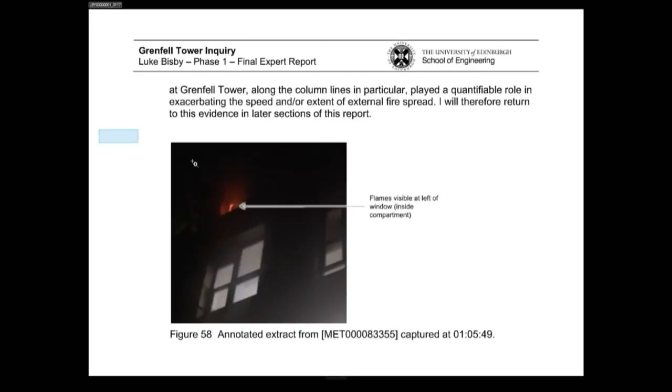Before I go to that, Professor, can I ask you please to turn first to page 117 of your report and look at figure 58. This sits within the part of your report dealing with vertical fire spread in the early part of the fire, and you identify this as a picture extracted from the video, captured at 1:05:49, showing flames visible at left of window inside compartment.

I just want to pick this up with you as a data point. At this point, 1:05:49, could smoke from within the compartment be heating up the UPVC window surround, causing it to deform? Yes. What about radiated heat from the fire? Yes.

Now what I'm going to do is start the video and run it up to 1:11. I'd like you to signal when you want to stop and identify important things, because we've heard earlier that you changed your opinion between your first report and your second report. I need you to explain by reference to this video what we see, focusing particularly on the timing of the fan failing and the timing and place of where we see melting droplets of polyethylene. Okay, so you're going to be in control. I will try. And if you have to go back to anything, we can do that. Can we start, please, Paul?

Thank you. Can I take you back into your report at page 122? I want to pick up figure 66 - this is actually page 123, it probably spans the two. You identify in the text at figure 66, at the bottom of the page, intermittent flaming between the spandrel cassettes above, between level 4 and level 5. And we saw that on the video, and you showed us that.

And also intermittent flaming at the vertex of the column and the spandrel. Is that more consistent with hypothesis B1 or with B2? The intermittent flaming at the junction between the spandrels, I would say, is more consistent with the flames venting hypothesis. The flaming at the column could be due to either of those hypotheses.

Under hypothesis B1, would one expect to see the burning of the cladding directly or more directly above the window, as opposed to on the side, as we do? I would expect that, given the buoyancy of hot gases and the tendency for flames to move in that direction, yes. So would that not then tend to support hypothesis B2 over B1? Or is that just shorthand again? I think so, yes.

Similar question - look at figure 68A, please. This is thermal imaging, page 126 of your report. And you've set out the relevant thermal images at the second pulse and a second after the second pulse, at about 114. Looking at this...

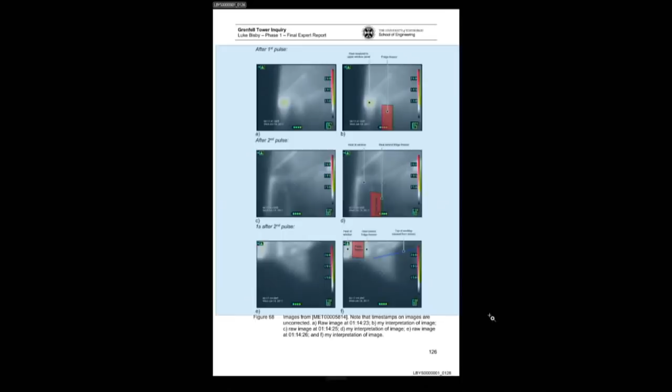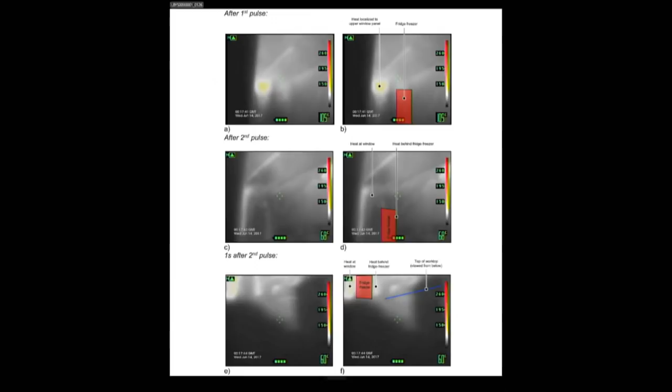Is the picture that these show, particularly figure 68A, the heat still there after the first pulse, and then the absence of it after the second pulse, consistent with your hypothesis B1 that the fire vented out of the open window or the extract fan? The hot spot, as Professor Torero discussed yesterday, given the resolution of these images, it's difficult to say anything too conclusive. That hot spot in this image does appear to be approximately in the location of the extract fan panel, which could indicate that this is a time - here we're at about 114? Yes.

So it could just simply be the extract fan panel burning, or it could be anything burning in that location, but it's in the approximate location of the extract fan panel, I would say. Does this evidence help us in any way decide as between hypothesis B1 and B2? Not really, in my opinion, no.

Moving on to some other evidence, we have evidence from firefighter Daniel Brown that after 1:20 a.m., a little bit later, he could see within the cavity behind the panels and could see fire travelling up the building. He leant out of the window and aimed his jet into them. He says in his contemporaneous notes - for the record, this is MET 000 5251 at page 3 - that the fire was travelling in an upwards direction behind the cladding. It was easy to see, he says, the material behind it was alight and travelling upwards. However, the vast majority of the cladding remained in place, and any attempts to extinguish simply bounced off. And similar evidence later when he gave evidence and in his statement to the police in fuller form.

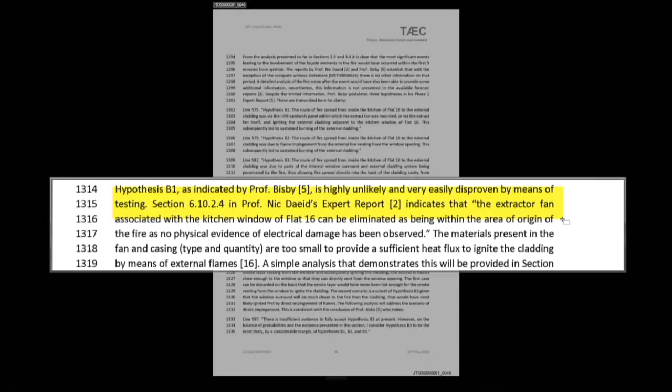So he says hypothesis B1, as indicated by Professor Bisby. I think, is this his most recent version of his report? Because I think he's referring to my original B1. He may well be, in this location. I can hear mutterings around me, which rather indicates that I should... I think this is referring to the fire starts in the extract fan as a hypothesis.

Now, moving forward then, to talk about direct flame impingement through an open window, is it relevant, having considered Professor Torero's report and also seen your own work based on the visual inspections of the video, that flames would have come out from a hot compartment into a relatively cool atmosphere outside? Certainly one of the consequences of venting outside is a cooling effect, both on the gases and on the flames, as a consequence of the cold air entrainment that would occur, yes.

Would that have affected the ability of flames coming out of the open window or the gap left by the vent extract fan to impinge upon the ACM? Potentially, but we see flames impinging on the ACM in the footage, so we do know it's happened. The question is whether the time at which it happens, which is admittedly 2 to 3 minutes after we suspect that we see involvement of the ACM cladding, gives us enough confidence that that is the primary candidate for ignition of the cladding, or whether that is a secondary effect that happens after the cladding has already ignited from within.

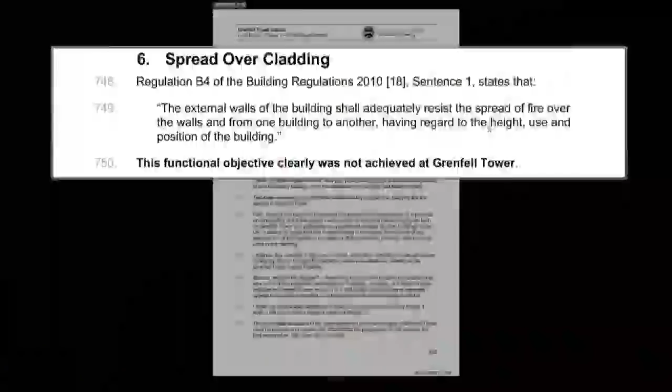748 to 750, and you've got regulation B4 up there, and you say the functional objective of B4 is that the external walls of the building shall adequately resist the spread of fire over the walls and from one building to another, having regard to the height, use and position of the building.

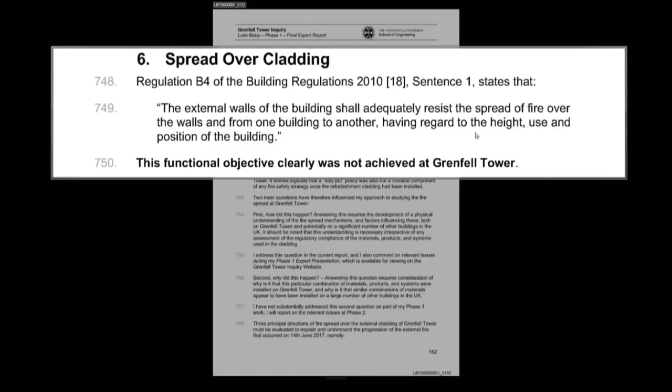And you say the functional objective was clearly not achieved at Grenfell Tower. I think it's right that you haven't at this stage considered compliance with the guidance in approved document B, have you? Not significantly, no.

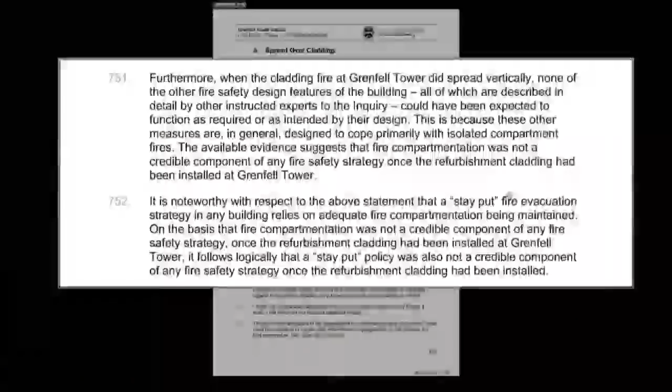You do, though, go on to say at paragraph 751 and 752, and particularly in 752, picking it up in the third line, that on the basis that fire compartmentation was not a credible component of any fire safety strategy once the refurbishment cladding had been installed at Grenfell Tower, it follows logically that a stay-put policy was also not a credible component of any fire safety strategy once the refurbishment cladding had been installed. And I show you that.

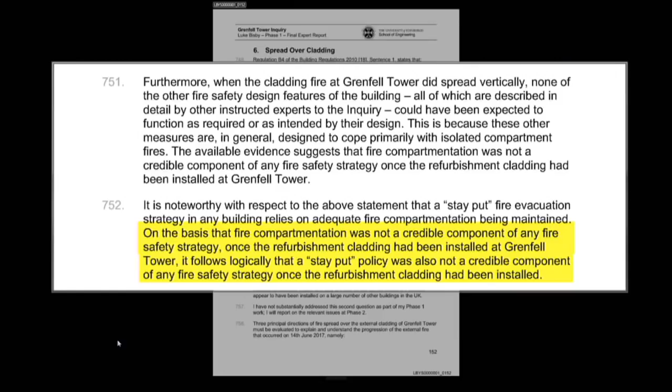And there are three, I think, reasons why you say that in terms of directions of fire spread: upward, downward, and horizontal. And those different theories underpin this basic thesis that a stay-put policy was not a credible component of any fire safety strategy at Grenfell after the refurbishment.

The fundamental assertion I'm making here is that if a fire is ignited in a cladding system such as this, made from these materials, under any circumstances, we have to expect it to spread quickly and catastrophically because of the nature of the materials involved. On that basis, it is unreasonable to expect compartmentation to be maintained, and it is unreasonable to have a stay-put policy in place.

Now, of course, that relies on someone recognizing that they've got this material on their building. Yes. Which is clearly not the case, apparently, here. Well, I recognize it's quite a strong statement, but it's in a sense a philosophical one. Well, so philosophical, and that's your opinion. Yes, but it relies on this assumption that people actually are aware of the cladding that they have on their building.

Yes. Now, I'm going to ask you some detailed questions about your analysis of each of the three routes of fire spread: upward first, then downward, and then horizontal, if I can.

Before I do that, can I just ask you to look briefly at Dr. Lane's basic hypothesis. This is BLAS 5010 at page 5, figures 10.2 and 10.3 of Dr. Lane's report. We can just have those up there. They're there for you. She has identified 6 different pathways for fire spread, and you can see those particularly in 10.2, and then you also got F in 10.3.

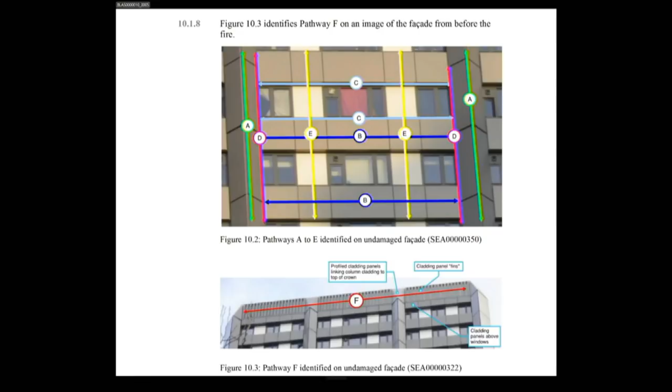I have questions about A and D, the columns. They represent the 2 vertical channels, I think, that you say played an important role in the fire spread on the night. That's correct. That's right, is it?

Now, Dr. Lane's also identified a 3rd vertical pathway, E. You can see it, it's yellow in figure 10.2, which I think is via the insulating core panels which connect between the spandrel panels. Would you agree with her? I mean, I would agree that those are continuous bands of material that can burn. I'm not sure that I would agree that I've seen either evidence or a physical mechanism by which that is a direction of travel of a fire front, if you see what I mean.

I do. We'll leave aside fire front, we may come back to that. Can I just ask you to be shown page 39 of Dr. Lane's report, figure 10.37, under paragraph 10.7.2, which is a photograph of the vertical fire spread up insulating core panels, estimated time at 1:26, taken off YouTube. Now her view is that this image shows evidence of fire spread up the insulating core panels. My first question is, have you considered that as a pathway?

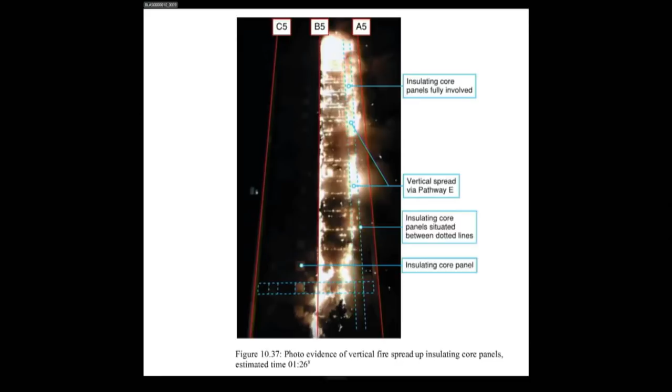I've considered the fact that the insulating core panels will burn. Yes. So this is a photo that shows insulating core panels burning, yes? That is what she says. It's not necessarily a photo that shows vertical fire spread, because we can't see which way the fire is going in a still image. I follow. Yeah? That might seem a bit pedantic, but I do think it's an important point.

So I could assert that the insulating core panels have been ignited by falling burning debris rather than an upward fire spread mechanism. And on the basis of this image, I don't think you'd be able to say that I'm wrong. Okay. Does that make sense?

Thank you, it does. Yes, it makes sense to me. I'm not saying that it isn't - I'm just saying that I think it's difficult to assert that.

I mean, we could discuss in detail my fire spread mechanisms. I suspect that we will.

All right. So you say that on the basis of this photograph, you couldn't confirm to a degree of confidence that the insulating core panels were a route of vertical fire spread.

That's correct. The insulating core panels burn, or the core material, the XPS inside, is a combustible material, and it will burn under some conditions. How it is that any one of those particular insulating core panels that appears to be burning in this image came to be burning, I think is almost a different question.

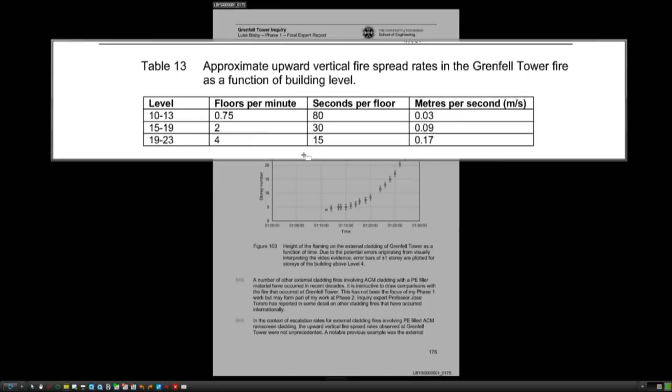Now you've got a table at the top of that page, table 13, approximate upward vertical fire spread rates in the Grenfell Tower fire as a function of building level. And I think we can see, is this right, that in general the rate of spread gets faster as the flame front gets further up the building?

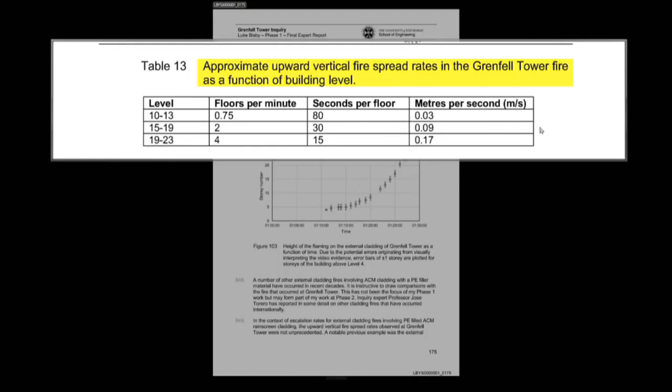Yes, that's true, and you can see that. It only takes 80 seconds to go from level 10 to 13, but it only takes 15 seconds to go from 19 to 23. That's correct. It's travelling at a rate of 0.17 metres a second. So yes.

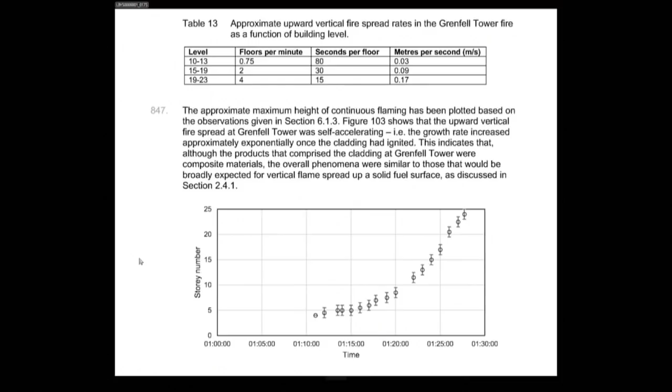Now, I think you say, at paragraph 847, just under that, you do say this is similar to vertical flame spread up a solid fuel surface. It's the last sentence of that paragraph.

Yeah, I mean on a solid fuel surface you would expect an exponential increase in the rate of spread based on the available research. Yes.

Right. Now, when you say a solid fuel surface, could you just explain what you mean by that?

So the scientific literature on vertical fire spread, dating back many decades, people have been running experiments on vertically oriented fuels so that we can try to understand the physics of the upward concurrent fire spread mechanism. Obviously, if you want to understand something that is actually quite complex in terms of the physics, even for a vertically oriented fuel that is totally homogeneous, is a single material, doesn't melt, doesn't drip, doesn't flow, doesn't warp - it's a very well-behaved material - even studying upward concurrent fire spread on that very simple case is extremely complicated, in order to reproduce the physics.

And I was at a conference two weeks ago where the keynote lecture was by a chap who is still trying to do this for the very simple case. And then you bring a second surface in, you have a cavity, and he just sort of put his hands in the air and said, forget it. The models that we have, even the most advanced models, can't do this at this stage. So it's important to recognize the complexity of the science that we're dealing with here.

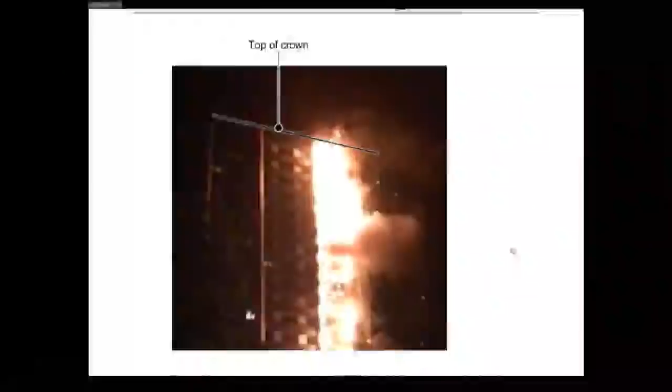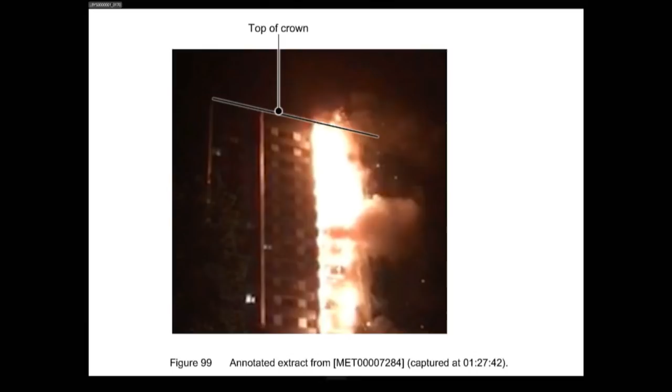But perhaps we ought to look at that. This is figure 99, a photograph captured at 1:27:42, showing that the Crown was involved in the fire by this time. Is this about the earliest moment when the Crown was involved, or was it involved there or thereabouts? There or thereabouts, I mean, I would say give or take 2-3 minutes.

Looking at this image, is there anything you can take from it which tells us anything about the mechanism for fire spread at the top of the building? Not as yet, I would say. I think we do see it later in some of the videos and photos, but on the basis of this photo, no.

Now, you've got, I think, five hypotheses of vertical fire spread, which you cover under section 6.1.6 of your report at page 177 and following. And you conclude at paragraph 859 - if I can just ask you to look at that, page 178, just highlight that please, Paul - you say that of all the available evidence presented thus far in section 6 of this report strongly supports hypothesis C1. I consider the presence of PE-filled ACM rain screen cladding cassettes to be, by a considerable margin, the most important factor contributing to upward vertical fire spread and indeed to external fire spread generally during the Grenfell Tower fire.

Now, we'll look at some of this in a bit more detail, but Dr. Lane's opinion is that the columns on the building were the principal route for vertical flame spread. Do you agree with her? Yes, I do. Are you able to explain the mechanism by which flames were drawn into and up the columns?

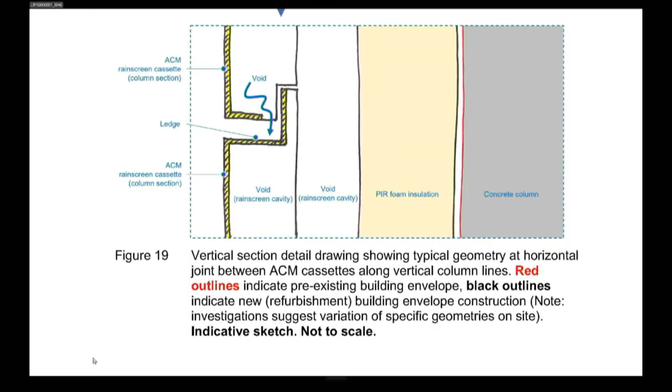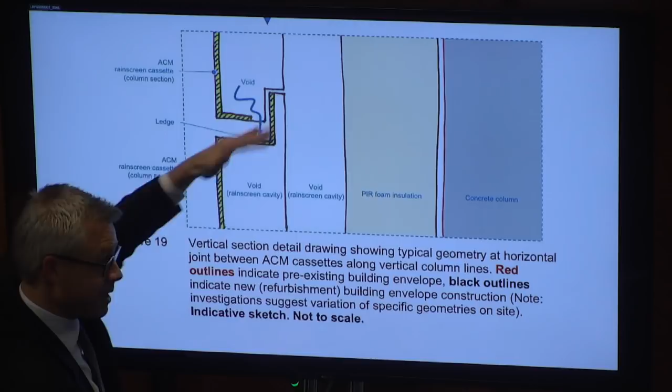If we look at figure 19 — that's page 46 of your report — just as an example, that's showing the joint between column cassettes. The point I was trying to make is, if you're rain coming down like this, the reason this joint is configured in this way is to prevent the rain from getting inside the cladding, while letting air in to ventilate it. But if you're spraying up from down here, one imagines you could somehow get some water in behind the cladding. That was the reason for that distinction.

But in general, the fact is that since the very large majority of this fascia is rain repellent or water repellent — it's going to repel water, yes — the actions of the fire brigade in external firefighting are likely to have little effect, is this right? If the cladding system is still intact, and doesn't have holes having opened up in it, then yes, I would agree with that.

This may be a completely wild idea, no doubt you'll tell me if it is, but if you could get above the fire and put water down the cavity, would that be likely to do any good? I wouldn't want to hazard a guess at that one. One imagines it couldn't make matters worse, but I wouldn't want to say the extent to which it would make matters better. Fair enough, thank you.

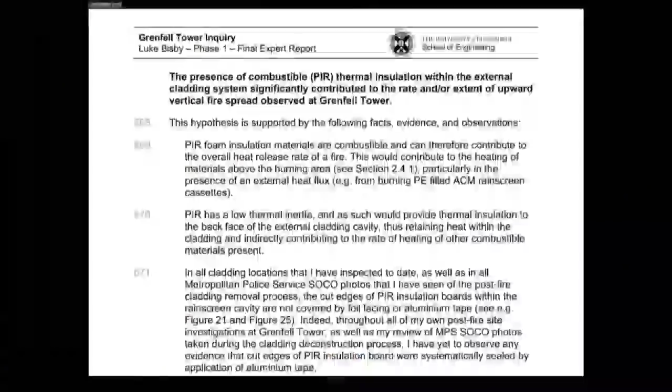Now, turning to hypothesis C, can I take you back please to the foot of page 178 and the top of page 179 of your report, where you set out hypothesis C. You say there: the presence of combustible PIR thermal insulation within the external cladding system significantly contributed to the rate and/or extent of upward vertical fire spread observed at Grenfell Tower. Can you explain the mechanism by which it contributed? It's important to say firstly that this is the hypothesis that I'm testing rather than a statement. I then come later to a conclusion on that statement, on page 180. I just think it's important to note that those are stated as hypotheses rather than facts or conclusions, if you see what I mean.

You're right, and I've jumped a stage, but perhaps in my eagerness to move on. The physical mechanisms by which PIR could contribute to upward vertical fire spread would be both...

PIR is a combustible material, so when exposed to a heat flux sufficient to reach the pyrolysis temperature, it will pyrolyze and release combustible pyrolysis products. Those could contribute to an increase in the local heat release rate of a fire. The extent to which that pyrolysis will occur and contribute is unquantified at this stage, but that's one potential mechanism.

They could exacerbate heat release rate and thus accelerate upward vertical fire spread. The other mechanism is that these materials have very low thermal inertia, meaning the surface temperature of the PIR will rise very quickly when exposed to an external heat flux. That hot PIR surface will radiate heat back at the ACM panels and effectively insulate the cladding compartment, preventing loss of heat from the system and thus potentially accelerating upward flame spread, compared with a backing insulation that is less thermally efficient, i.e. has a higher thermal inertia.

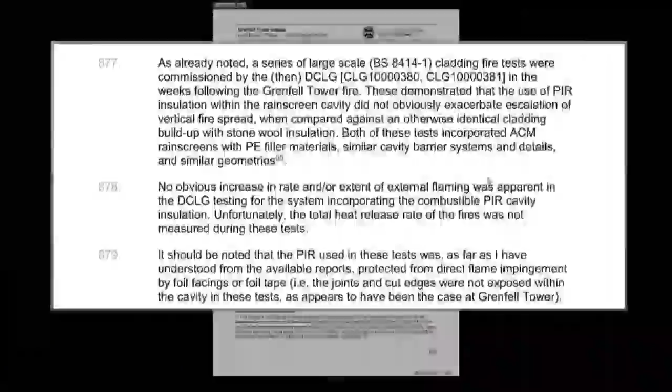That leads into a related issue. In paragraphs 877, 878 and 879 on page 180, you refer to a large-scale test carried out by DCLG, as it then was, in the weeks following the Grenfell Tower fire. You say these demonstrated that the use of PIR insulation within the rain screen cavity did not obviously exacerbate escalation of vertical fire spread, and you explain why.

And then at 879 you say it should be noted that the PIR used in these tests was, as far as I've understood from the available reports, protected from direct flame impingement by foil facings or foil tape, i.e. the joints and cut edges were not exposed within the cavity in these tests, as appears to have been the case at Grenfell Tower.

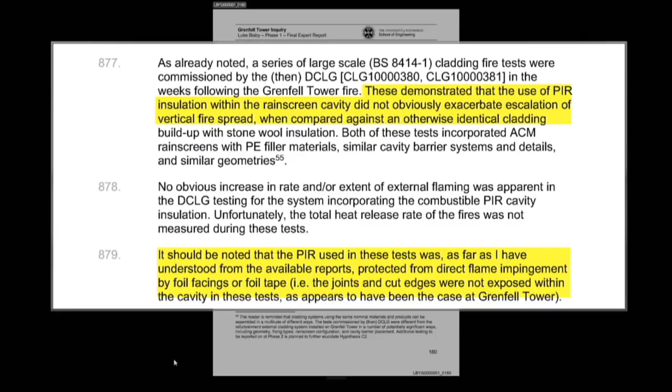Now, just expanding on that, first of all, what, in your opinion, was the utility of the CLG or DCLG tests in determining whether the PIR, as installed at Grenfell Tower, contributed to the rate and extent of vertical fire spread, given the lack of foil facings we've seen on the edges at Grenfell?

What is the utility of the DCLG post-Grenfell tests, specifically with respect to the Grenfell Tower fire? Simply illustrative, in that what those tests show is that if you have an ACM PE rain screen, the test, regardless of the backing insulation, escalates vertical fire spread very, very quickly. That is really the only reason I've presented that information in this report.

Right. Other than that, I would think they don't have much utility. Are you able to tell whether it makes a difference that the assembly used in that test did not have cut edges of PIR? I couldn't say one way or another.

Okay. Do you know whether in those tests the department used a riveted ACM panel rather than a cassette panel? I believe that those were riveted. Would that make a difference?

There is some information, and again, I'm not dealing with compliance in my phase 1 work, but there is some information I believe that we've received to the inquiry which indicates that a riveted system, as regards product classifications under standard testing, I think specifically through the test that we call the single burning item test, performs marginally better than the cassette system. The reason for that, I would presume, is because a riveted system is riveted through both faces of the aluminium, and they're held more tightly in place, which prevents them from opening up. But I've not tested that theory.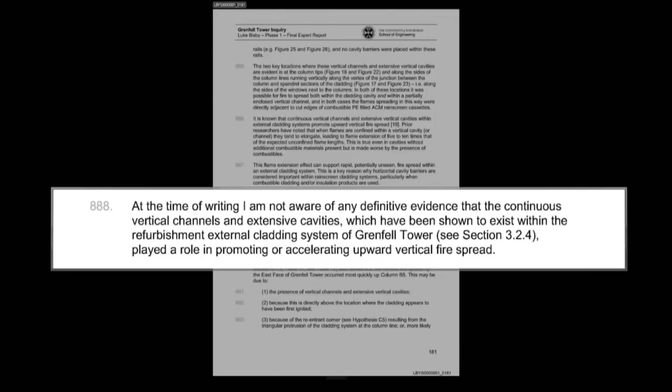Now, just taking that a little bit slowly, first of all, when you say definitive, what do you mean? I guess I couldn't say for certain that it plays a role that would significantly accelerate the vertical fire spread.

Right. Are you able to say within a range of probabilities whether the continuous vertical cavities and channels on the columns played some role in the fire spread vertically? Yeah, yes, I think it's likely. I think it's likely that they did. Yes, and I think I do come to that at the end of that section, 896, I believe.

Yes. I think I say on a balance of probabilities, given the available video evidence and oral testimony, along with the known importance of vertical channels, I consider it likely that these features contributed, although I can't quantify it at this stage. So you're not able to say how likely? I think it's very likely that they contributed to some extent.

I think it's almost certain that they contributed to some extent. Whether that's 1% worse or 50% worse, I wouldn't be able to say at this stage. So the difficulty you have is not the likelihood of the contribution; it's the extent of it, the significance of that contribution to the outcome. Quantitatively, yes.

Hypothesis C4, which is prevailing wind, you can reject, and you have. Hypothesis C5, your last one on vertical fire spread, relates to the specific overall geometry of the building, and you cover that at paragraphs 903 and following on page 182, where you explain what the geometry is.

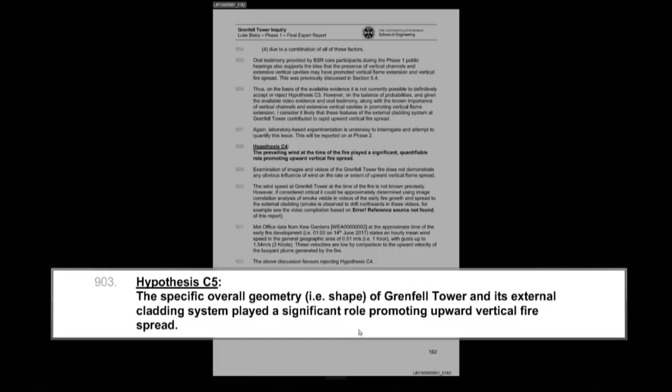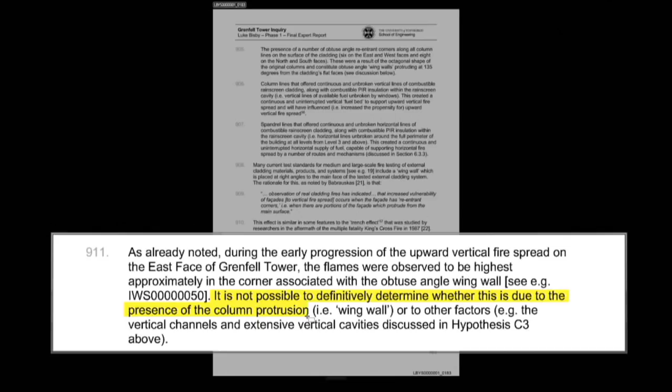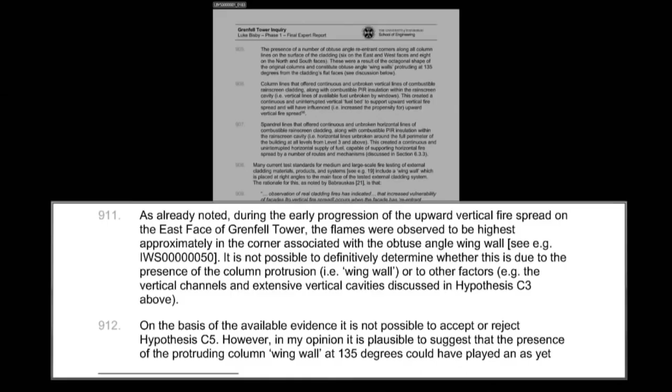And you say at paragraph 911 on page 183, in the pre-penultimate line, it's not possible to definitively determine—well, I'm not sure I've picked up the complete conclusion, perhaps it's 912. You say on the basis of the available evidence it's not possible to accept or reject hypothesis C5. However, in my opinion, it's plausible to suggest that the presence of the protruding column wing wall at 135 degrees could have played an as yet unquantified role in promoting rapid upward vertical fire spread. Additional work would be required at phase 2 to confirm and quantify this.

Now, to what level of confidence are you able to say that the presence of the protruding column wing wall did play a role?

Well, so the physics at play here is two effects. One effect is that having the fire confined within a corner, even if it's not a right-angle corner, does two things. It changes the way fresh air is entrained into the fire, meaning you get less air entrained at its base because of restricted access due to confinement. That has an effect of elongating the flame as it searches for more air to continue burning. So you have flame elongation in a confined area, which would exacerbate upward vertical fire spread, in the same way confining a fire within a cavity causes flame extension.

And the other effect is that if you have a flat wall, the wall looks out and sees the cold world. If you have walls at some angle to each other, then part of what one wall sees is the other wall, which is hot. You get a re-radiation effect, which causes temperatures to increase locally, which again will exacerbate vertical fire spread.

So I think plausible is perhaps not as strong as I ought to have used. I think it's very likely that there will be some effect, but quantifying it is the challenge. I'm not aware of any work in the technical literature that looks at wing walls at angles other than 90 degrees, so the extent to which that's important, I couldn't say at this stage.

Just picking up a couple of points of detail. Paragraph 906 within that hypothesis, you refer to column lines offering continuous and unbroken vertical lines of combustible rain screen cladding, along with combustible PIR insulation, i.e. vertical lines of available fuel unbroken by windows. You then say this created a continuous and uninterrupted vertical fuel bed to support upward vertical fire spread and will have influenced, i.e. increased, the propensity for upward vertical fire spread.

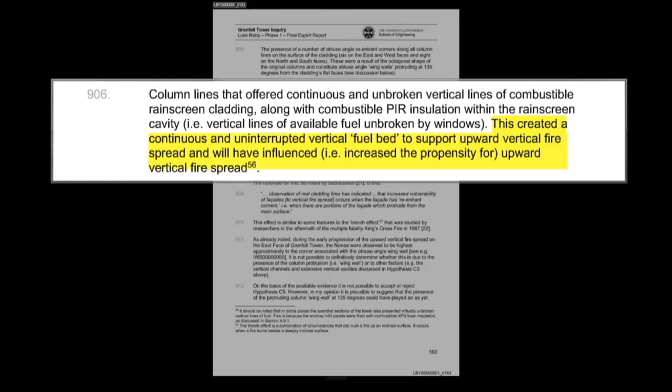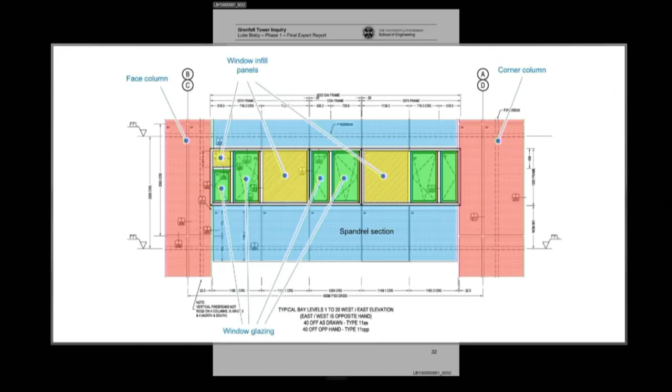Okay, now keeping a finger in that, and perhaps I'll just do this by telling you: at 907 on page 183, you refer to spandrel lines offering continuous and unbroken horizontal lines of combustible rain screen cladding, along with combustible PIR insulation within the rain screen cavity, i.e. horizontal lines unbroken around the full perimeter of the building at all levels from level 3 and above. You say that created an uninterrupted horizontal supply of fuel capable of supporting horizontal fire spread by a number of different routes and mechanisms.

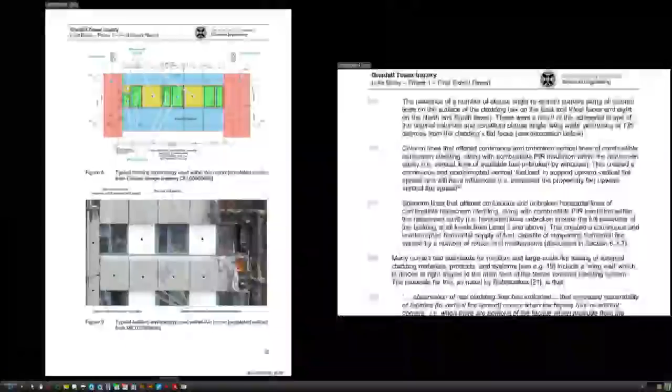A number of routes and mechanisms. Coming back to figure 8 on page 32, can you identify those very briefly for us? Those are the blue sections. And to be fair, they're continuous and uninterrupted only because the columns also provide a means for them to pass by the column, if you see what I mean.

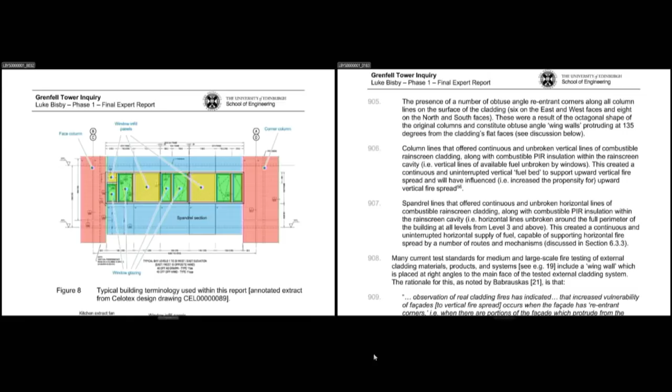Yeah, absolutely. Now finally on upward fire spread, Dr. Lane says, at paragraph 10.4.20, page 28, that the cladding rails for spandrel panels provided a route for vertical fire spread because they essentially bypass the cavity barriers. Do you agree with her?

I do. Right. I can now turn to downward fire spread, which you cover at section 6.2 of your report, starting on page 184. And is it right, Professor, that downward spread, in your opinion, is caused by two things: one, the melting and running downwards of the polyethylene, and second, the opposed flow flame spread?

Yes, with the first of those being the dominant one. The melting and running downwards of PE. Correct. Now, you've defined, I think, opposed flow flame spread in your report on page 184 in footnote 58.

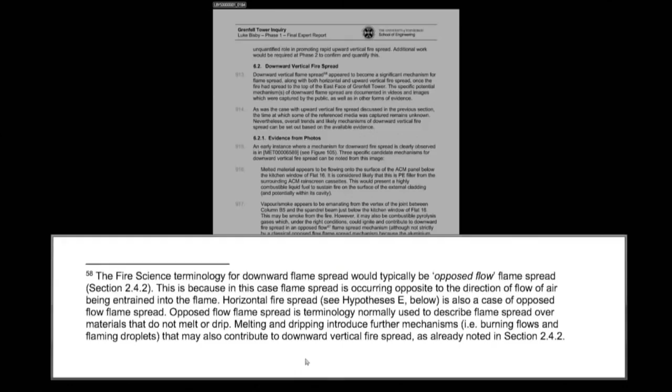And I take it that is the definition that you're using. What role, in general terms, did opposed flow flame spread play in the downward spread of fire, in contradistinction to melting and dripping, at Grenfell Tower? I think it likely played a very small and potentially insignificant role.

Now, your view, I think, is that you can see downward fire spread earliest along column lines. Is that right? And that's paragraph 926 at page 189.

Can I just take you through a number of figures from that part of the report, starting at page 190, if we can jump ahead to that, and start with figure 110, running through to figure 114 over 3 pages.

If you go through, starting with 110, you say there it's an extract from a video captured at approximately 250, and it appears to show dripping material and downward fire spread at the corner of column A5 and the north face. So that's essentially the northeast corner, is it?

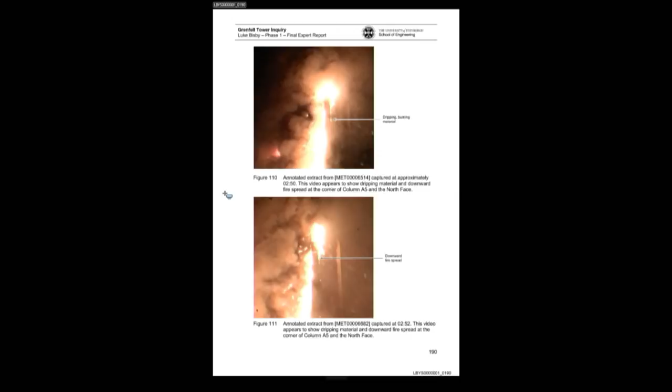Yes. You identify dripping burning material there, just hanging down on the right-hand side from the main— sorry, that's the northwest corner. It's the northwest corner, is it? Then you've got, is it the same corner where you've, in the next photograph, downward fire spread?

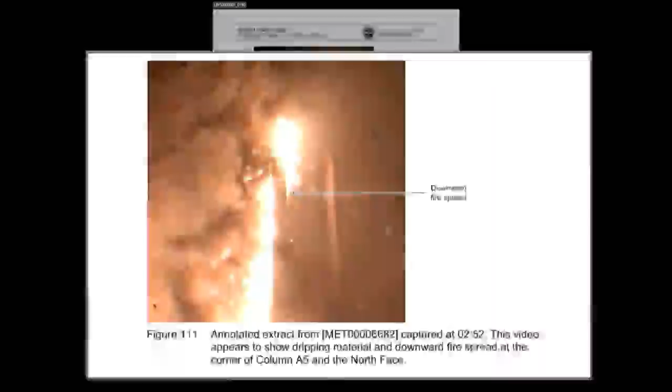Is one a continuation of the other? Yes, and in fact, in one of my videos, it'll be either the north face video or the west face video. There is video footage of this, which is far more instructive, to be honest, than the images. But the images tell the story, if you like. And yes, the two things I would highlight there is that along the right-hand side of that corner column, you see clear downward fire spread.

If it was a video, you'd see progression of that fire front down the column. And you also see the lines of light that are on the column. There's sort of one line and then a secondary line slightly further below at story heights. And those are the horizontal breaks in the cassettes along the column.

And I believe that what we're seeing there is pooling of burning polyethylene on that little shelf that I showed previously in my diagram, as the polyethylene drips down inside the columns.

So just on this picture, if you could point that out, you may have to get up. I'm sorry to make you do that. No problem. Yeah, sort of here. And here. And you see it actually on every column on the building where we have video evidence.

You see this occurring. You see these lines light up ahead of the obvious external fire spread, and so you have this progression of the dripping polyethylene down. And it pools locally on horizontal surfaces within the building. That could be these sort of little shelves that you get at the junctions, or it could actually be on top of cavity barriers within the system, which essentially provide shelves inside the cladding system.

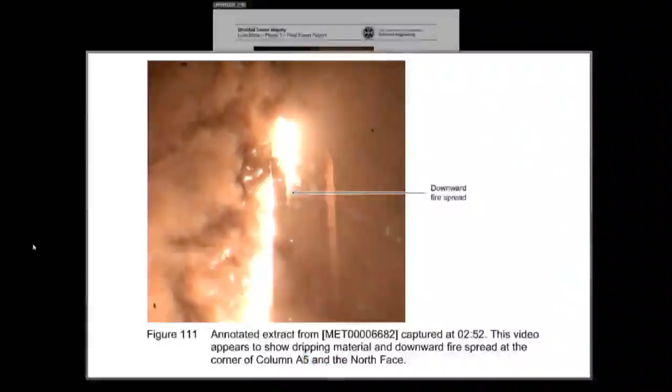And I believe that's one of the key mechanisms of downward fire spread. And then you have a locally burning pool fire of polyethylene, which can heat the material here in these cladding cassettes, melt them, and then a further progression of the polyethylene down the building.

Just before we leave that picture, you can see some way below where the downward fire spread arrow is pointing, there's another bright pinpoint of light. Do you see? Just here. There, yes. What is that? It might be just falling debris. It's hard to say from a still. We could look at the video.

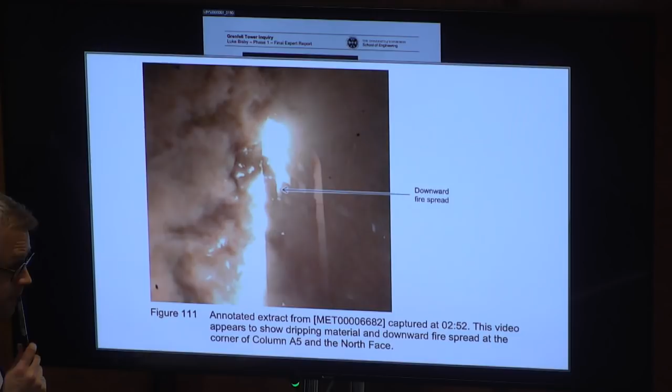I suppose. But moving on then to the next figures, 112 and 113 on page 191. Again, you could see dripping burning material in both of those pictures, falling and landing on window details.

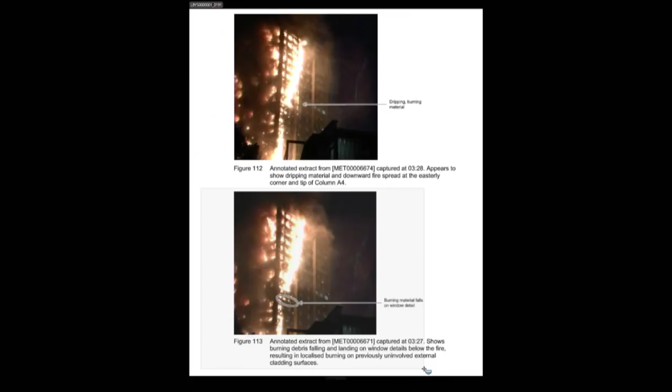That's what you say in relation to figure 113. Can you point anything specific out from there about how it is that burning, dripping material is actually spreading fire? Yeah, I mean, this is actually, I think, a very important point.

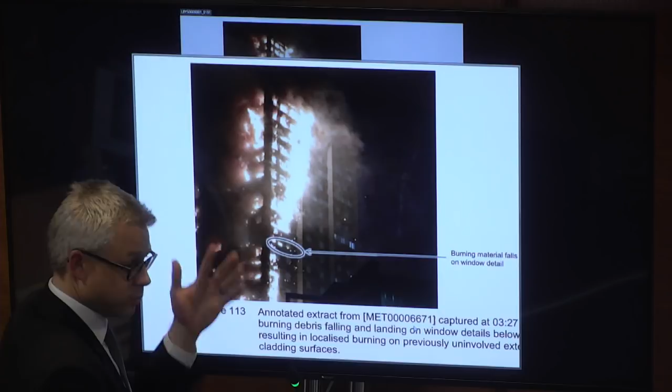We see this inclined front of the flame here. It's also interesting to point out that after that very bright line passes, we see much less flaming. We have compartment fires burning within these flats now, but we see dark patches on the cladding, which does go to this question of the extent to which the backing insulation is still contributing once the polyethylene has burned out of the rain screen cladding, and indicates that not so much would be the answer to that question.

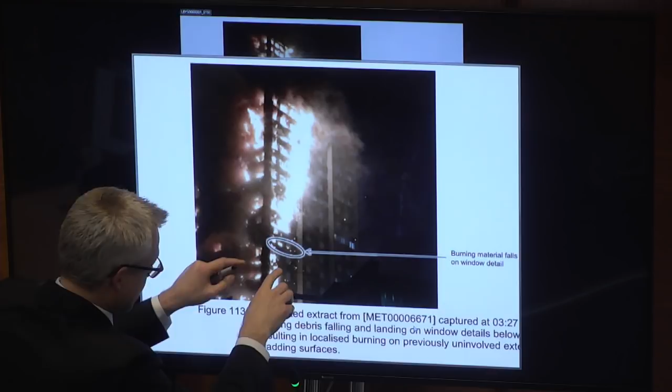Yeah, but nonetheless, you see we have this diagonal line here. The bits that we've circled here, again, if this was in a video, what you would see is material falling down, landing on either the window sills or in cases where the cassettes have disappeared on top of cavity barriers, and forming these localized pool fires, which then cause generation of energy up and further fuel this diagonal line.

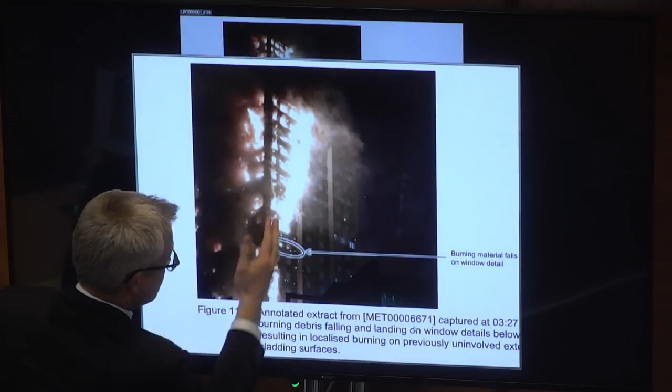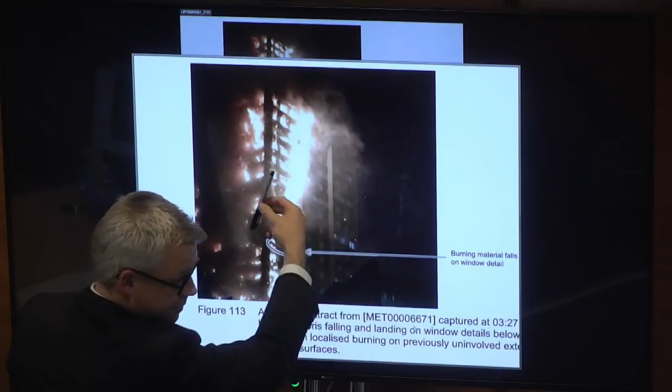Yes, but the key thing I wanted to mention was, if we imagine that this diagonal line sort of stays a diagonal line, which is what we do observe when we watch the progression of these flame fronts or fire fronts across the face of the building, if it starts here at the top corner, which is where it does start based on the images we looked at a minute ago.

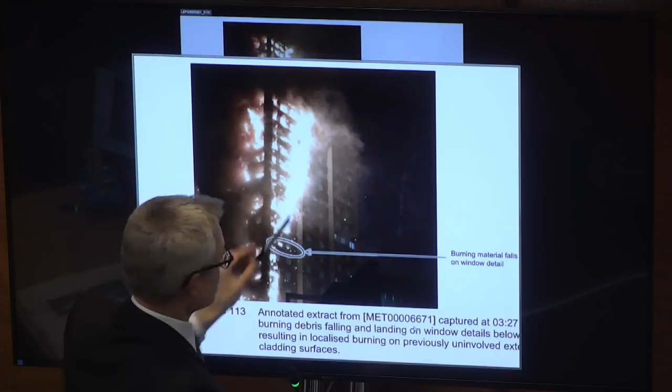We could imagine that diagonal line just moving down like this. And the consequence of that would be an apparent lateral spread. Yes, because it's a diagonal line just moving down, right? We could also imagine that that line goes like this, and it would look just the same.

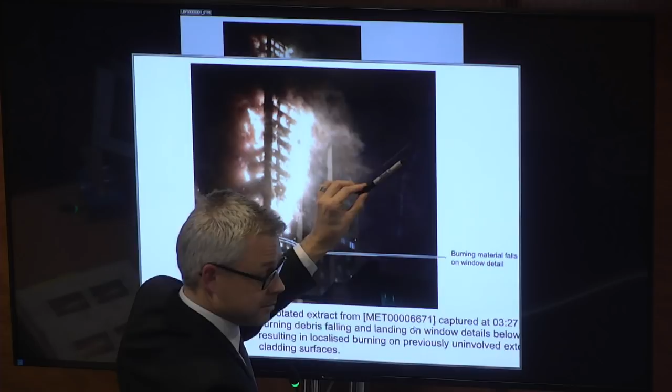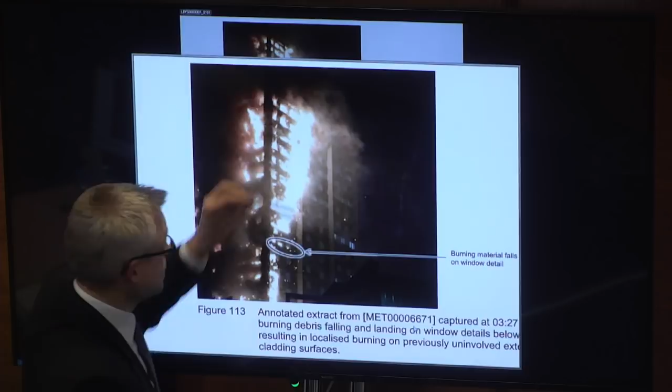So the question is, how much of the lateral fire spread is that which is opposed flow along the spandrel panel? How much of the lateral fire spread is that which is dripping, burning polyethylene? Now clearly it's some combination of those two. My view is it's predominantly this - the dripping and melting.

Now, what enables you from this or the other photographs we've been looking at to form that view? It's a combination of the fact that opposed flow fire spread on the spandrel panels would be quite a difficult thing to have happen, because these are aluminium coated polyethylene rain screen panels, so they tend not to spread fire laterally unless there's some other factor at play.

Opposed flow fire spread in a lateral sense relies on there being fuel ahead of the flame front, and it relies on there being energy getting to the fuel ahead of the flame front. If you have a burning ACM PE core rain screen panel, there's two questions you have to ask. The first question is, where does the energy go? The energy goes mostly up. And the second question you have to ask is, where does the fuel go? And the fuel goes mostly down.

Granted, some of the energy goes with it because it's burning. So if your energy goes mostly up and your fuel goes mostly down, you're not left with much to cause lateral spread, right?

That, combined with the fact that when we observe the video, in particular the thermal imaging video from the helicopters, the NPAS videos that were taken on the night, when they switch to a thermal imaging filter in those videos, hopefully we'll have a chance to see some of it, it is really striking the amount of hot burning debris that is falling down this building, which is not visually obvious when you look at an optical view. When you look at thermal imaging, it's like a waterfall of molten burning material falling off the side of this building, contributing to heating of the cladding below the flame front.

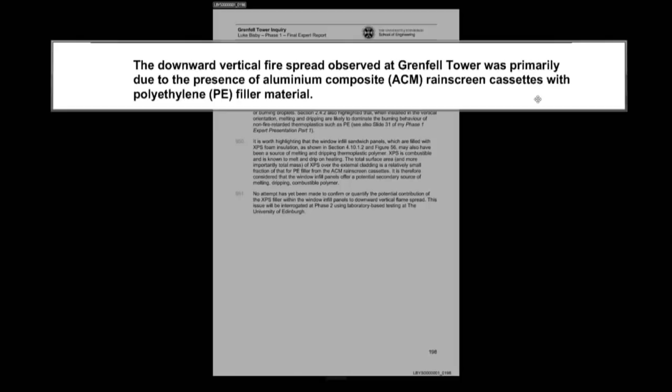Starting with D1, at the foot of page 197, the top of page 198, you state that the downward vertical fire spread observed at Grenfell Tower was primarily due to the presence of aluminium composite material ACM rain screen cassettes with polyethylene PE filler. Your conclusion is found in the paragraph immediately below at 948, where you say it's considered to be the dominant and decisive factor contributing to downward vertical fire spread.

That's clear enough. Can I just ask you whether you formed a view about whether the XPS panels contained in the infill panels and the panels supporting the vent extract fans contributed as a source of melting and dripping material, contributing in turn to downward fire spread? I think it's possible, but I think the potential is, in comparative terms, quite small.

I would base that opinion on two key arguments. The first is that, as I've already discussed, when XPS is exposed to a heat source, it tends to shrink away from the flame and then burn in situ. It is capable of forming a pool fire under the right conditions, but in small quantities, heated quite severely, I would expect it not to necessarily do that. Indeed, the PowerPoint presentation we have from the LFB about the Shepherd's Court fire shows experiments done by Bureau Veritas in the wake of that fire, looking at panels with the same, or apparently the same, blue XPS insulation. In that case they actually do set alight some panels and don't see pooling, but they do see shrinking away from the flame. So for that reason, I would say probably not that substantial an effect.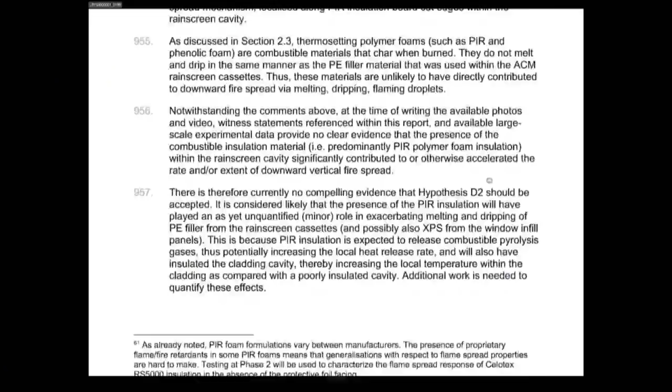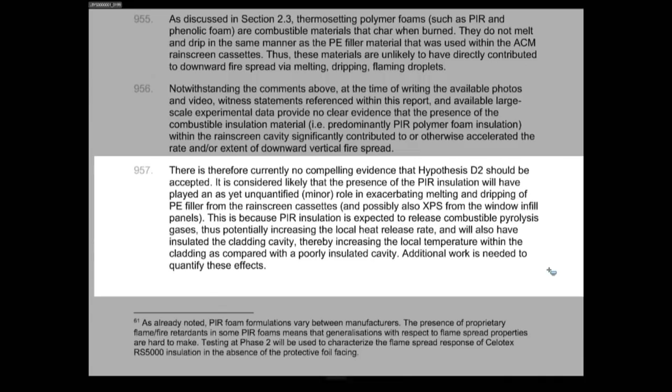Now turning to your hypothesis D2, on page 199 at paragraphs 952 and following, you say that the exposed edges of the PIR insulation may have contributed indirectly to downward fire spread, but there's no, quote, compelling evidence, unquote, that it played a role, at paragraph 957. But you go on to say it may have played a minor role by insulating or heating within the cavity, which we've covered before. Is that the same mechanism? It's the same idea, yes, keeping heat within the system, which has to do something, and that would just accelerate the downward spread.

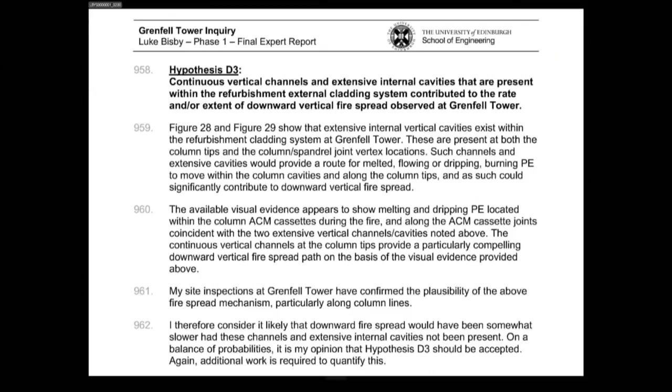Now, hypothesis D3 at the top of page 200 concerns the continuous vertical channels and extensive internal cavities contributing to downward fire spread, covered at paragraphs 958 to 962. Is your conclusion there that it's likely downward fire spread would have been somewhat slower, as you say at 962, had these channels and extensive internal cavities not been present? Is that conclusion confirmed by your visual evidence? Yes, it is. There's extensive evidence at Grenfell Tower of solidified polyethylene in the locations of those cavities that has dripped down from above to the cooler parts of the building near the base, and you have large quantities of polyethylene in the base of the building in those locations, which is fairly compelling evidence.

Now I want to turn to horizontal spread and the crown. I'm going to show you a little bit of video. Again, I should repeat the trigger warning: this building is very much on fire, and a lot of people might find that distressing. There is also some audio that goes with it, which people might again find distressing, so if they don't feel up to seeing it, they should either leave this room or remove themselves from the live stream.

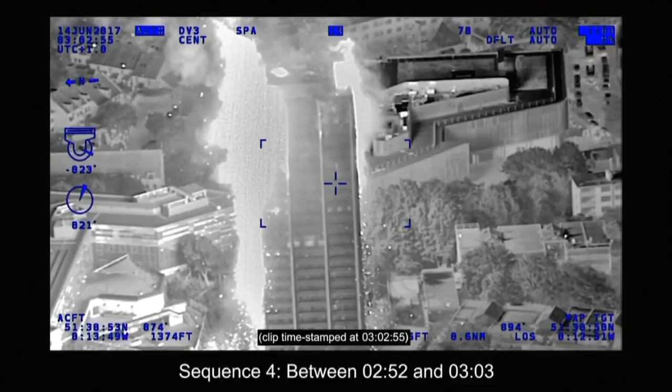Thank you very much. Can anyone tell me if it's all under control at Clarendon Walk? GT, I think it's Clarendon Walk. There is no Clarendon Walk, I don't think. Don't need that one at all. Can we then go to...

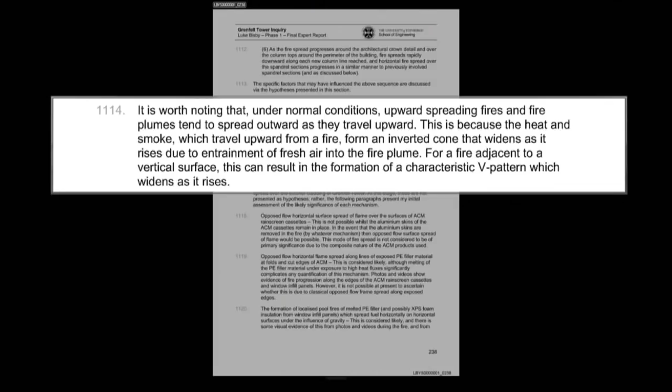Now, the other thing to pick up here is that you say in your report at page 238, moving to the beginning of horizontal fire spread hypotheses, and you have a number of hypotheses under E. At paragraph 1114, you say it's worth noting that under normal conditions, upward spreading fires and fire plumes tend to spread outward as they travel upward. That's because the heat and smoke which travel upward from a fire form an inverted cone that widens as it rises due to the entrainment of fresh air into the fire plume, resulting in a characteristic V pattern. Is the spread at the crown simply an example of that V pattern, or is it different?

No, I believe that what is driving the spread at the crown is the lateral progression of the pool fire beneath it, and not the inverted cone effect from vertical spread. If that were the case, then I would have expected the way we observe fire to progress around the building to be different than it is. I would have expected the vertical fire spread up the east face to be more of a cone in the first place.

Now, turning to your hypotheses, I think I can take these quite quickly. E1, paragraph 1115, page 238. Is it right that your hypotheses are not as well developed in relation to horizontal fire spread as they are in relation to vertical, upward and downward spread?

The hypotheses are not as well developed. I think we have more of them because there were more things we wanted to make sure of—many ideas were popping in as to what could be causing this lateral spread. It's worth noting, as Professor Torero said yesterday, the Grenfell Tower fire is quite unusual in the context of lateral or horizontal fire spread, in that when we've seen other fires in buildings with similar rain screen materials, we tend not to see the entire building engulfed. So the question is, why has that happened at Grenfell Tower? The distinguishing feature appears to be the crown, but I wanted to make sure that I looked at every possible option. So that's why we have a large number.

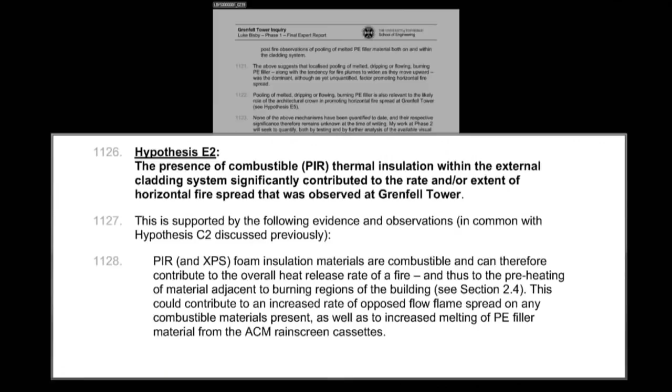As to hypothesis E2, paragraph 1126 at page 239, I think your conclusion is that, in theory, PIR could contribute to the spread of flame, but you can't quantify the extent of that contribution. Is that a fair summary of your view? I think it's possible, but I've no evidence to suggest that it did. Are you able to express any view now on the extent to which the presence of PIR contributed to the horizontal spread of fire? Not in any quantified way, no.

Right. Dr. Lane's view is that, at least at an early stage, the presence of cut and exposed PIR edges in the cladding structure, may have along the spandrel panels, supported horizontal flame spread. Can you agree with that, or can you not offer a view? I think it's possible. The thing that's important to recognize is that in order for flame to spread in an opposed flow mode horizontally, even on a PIR Celotex specifically that isn't protected with a foil facing, i.e. at a cut edge, you need a significant external heat flux that is sustained. In the absence of a significant external heat flux causing it to continue progressing—which means you kind of already need a fire there—you're not going to see that. The lateral fire spread on PIR in the absence of an external heat flux will generally stop.

Okay, Hypothesis E3, page 240, paragraph 1133. That hypothesis is that continuous vertical channels and extensive internal cavities present in the structure contributed to the rate of horizontal fire spread.

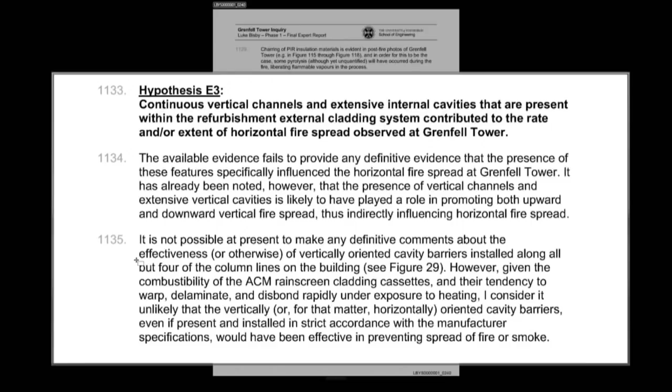Your opinion is that, I think this is 1135, it was not likely directly, although obviously indirectly as a consequence of having influenced both the vertical upward and downward spread.

Is there any evidence that cavity barriers were at all effective in initially preventing horizontal fire spread, not prior to the point at which the fire reached the crown? Not that I'm aware of, no. And indeed, as I've mentioned, I think there is evidence that after the fire front had passed a particular level on a building, whatever polyethylene was remaining tended to form pools and burn locally on top of the cavity barriers, potentially making matters a bit worse.

Yes, and we can see hypotheses E4 and E5, and your conclusions about that. E4 you reject, and E5 is about the architectural crown, and you've already explained the role you say it played in relation to that.

There's also a hypothesis E6, which is the contribution made, if any, by the aluminium and XPS composite window infill panels. And I think your conclusion there is that they played a role, but you can't quantify it. I'm summarising, perhaps inaccurately, but is that a fair description of your view about that?

This is with reference to the infill panels? Yes. Yes, I mean, the infill panels, as we've discussed, have fuel in them that is combustible and can burn. So in a fire that's progressing laterally, I would expect that fuel to become involved somehow and contribute. But quantifying it, I couldn't do that at this stage.

Very good. Can I finally turn to the last topic, which is spread back into the building? Just one or two questions about that. You've covered that at part 7 of your report, at page 253 under section 7.3, possible routes of fire ingress. And you've identified, from paragraphs 1167 to 1172, five possible routes for ingress of smoke and fire back into the building. My question is, are these set out in any order of likelihood?

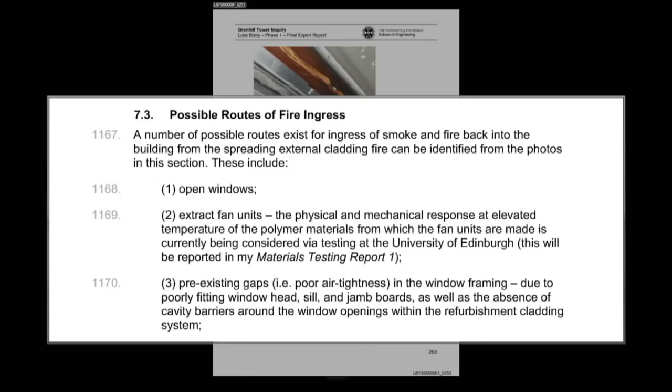The five routes... Yes, so it's page 253: 1168, open windows; 1169, extract fan units; 1170, pre-existing gaps. No, they're not set out in any order of likelihood, but throughout the following section, and in particular on the basis of evidence from the bereaved, survivors and residents, the conclusion I get to on this, that evidence is very helpful in this regard, is that it would appear that the routes of ingress depend on the nature of the fire spread that is adjacent to the flat.

So early on in vertical upward fire spread, where the fire is still quite small, the ingress routes are related to the extract fan and the window construction. We have comments in the witness statements to that effect, particularly associated with the extract fan and early failures of the extract fans. As the fire grows and becomes large, as Professor Torero said yesterday, glazing is actually not that resistant to high heat fluxes, and we have comments, certainly in the flat 6s as we move up the building, of people referring to their windows exploding inwards quite suddenly with very little warning prior to failure of the extract fan.

So the ingress routes depend on the mechanism of upward spread. As the fire is larger, the mechanism changes. And whilst I haven't looked at the witness statements regarding ingress during downward or lateral fire spread yet, my expectation would be, again as Professor Torero commented yesterday, that the construction around the window and the influence of the extract fans would be more important, because the downward spread mechanism is locally a smaller fire with lower heat fluxes than the very large heat fluxes you get in vertical upward spread with a big fire plume.